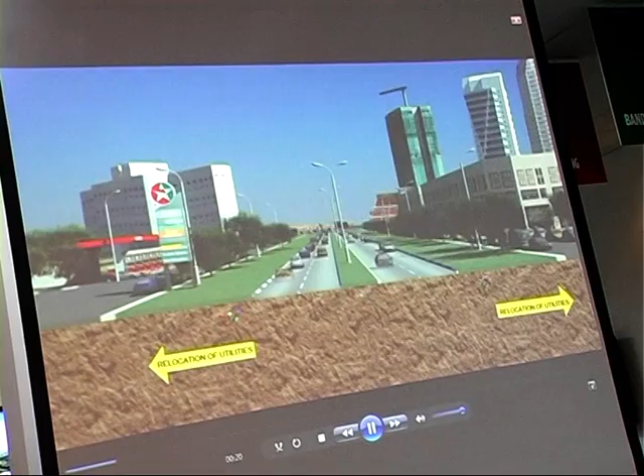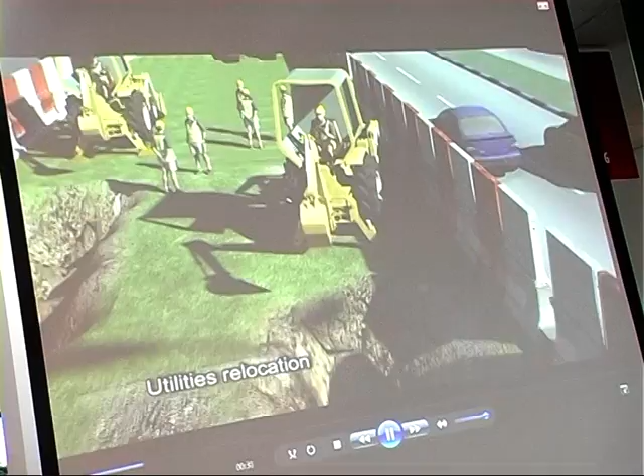So what you see is the first phase is utilities relocation. Those red, green and blue dots are relocation of utilities. So they are moved to the side of the road because work will be done on the median of the road.

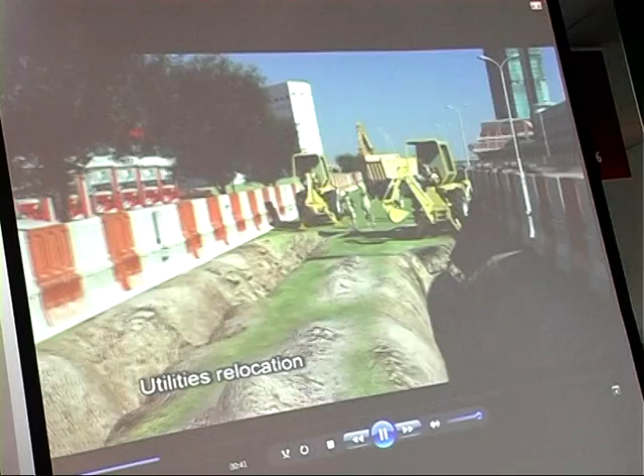This sample that we are showing you, this video, is actually in Taman Tun, the recreation of the Taman Tun work area.

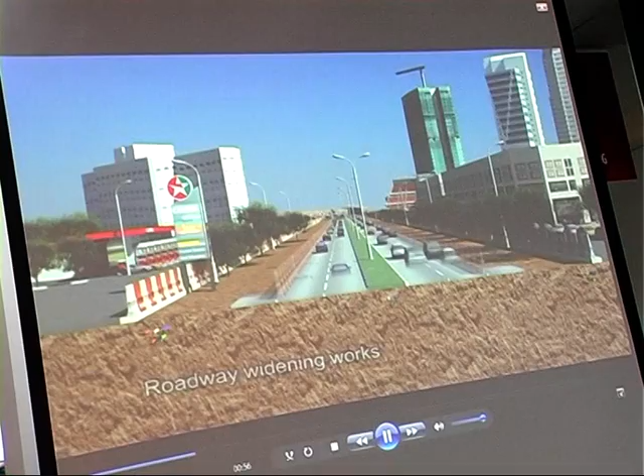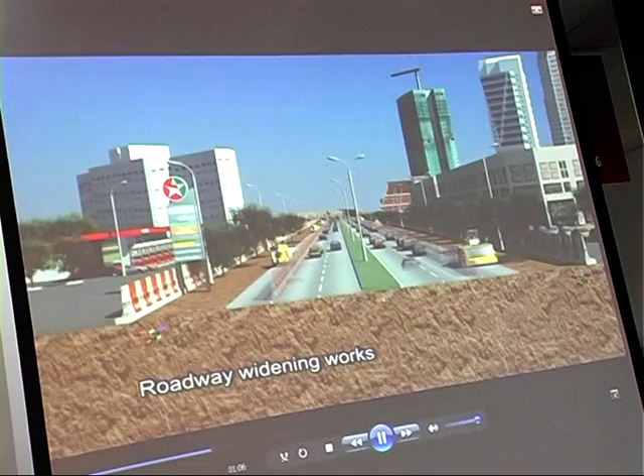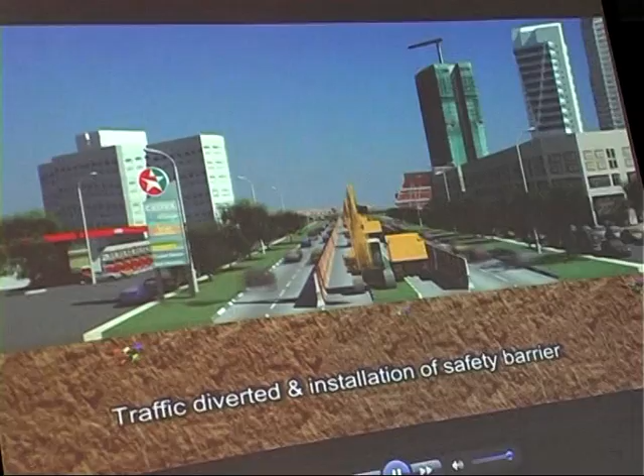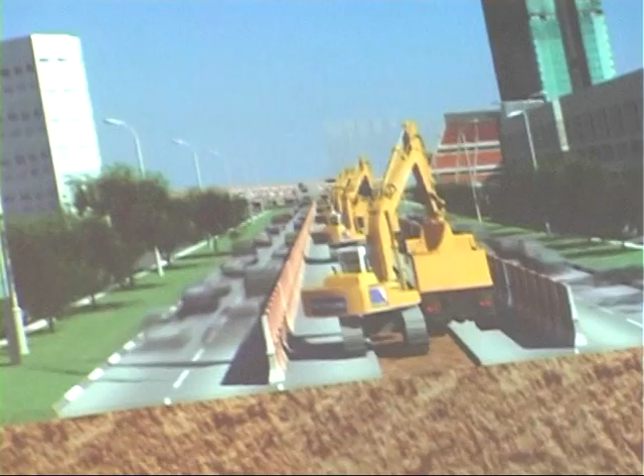So once it's already relocated to the side, then the road is tarred, so that this becomes the alternative route when we halt the center lane on both sides. So this is how it looks like when we have closed up the center area to work. Remain 2 lanes. The commitment that we make is that we are going to close lanes, but we will make sure that we get an alternative lane back for motorists.

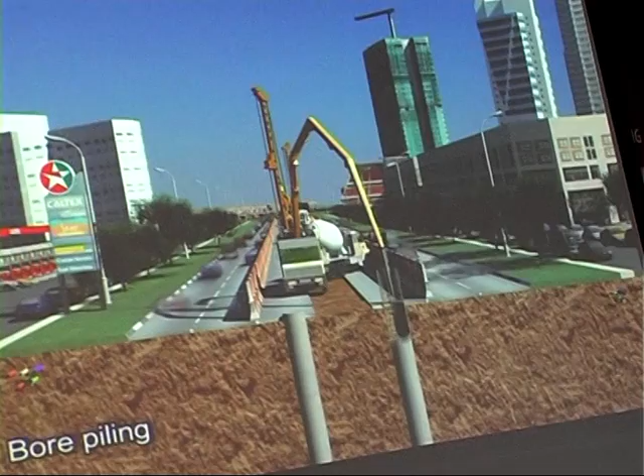Then the bore piling takes place. I wish it was this quick. It's not going to be this quick, but basically bore piling is the best way to do it. So once the bore is made, then you pour in the cement.

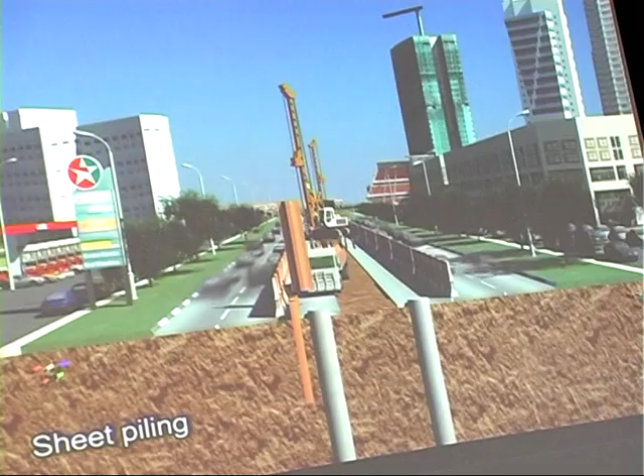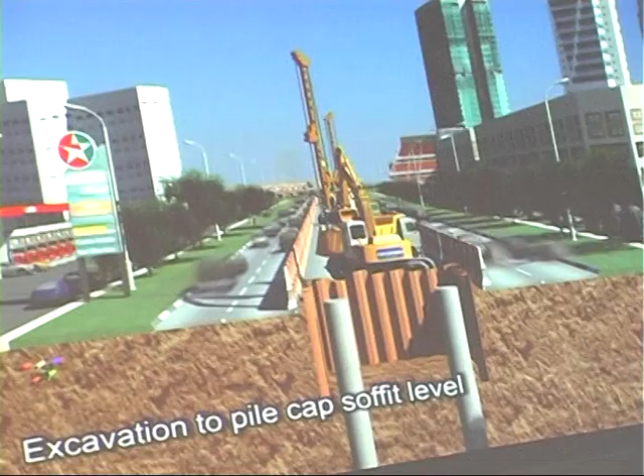So the sheet piling is installed so that we can do the excavation work to strengthen the area. Excavation to the pile cap soffit level, and then the pile cap is constructed above this.

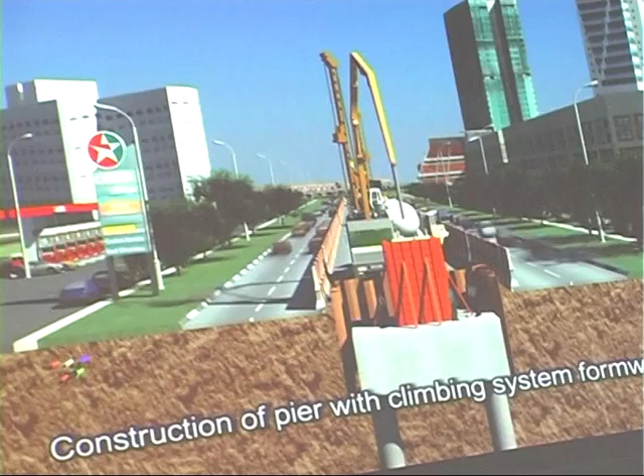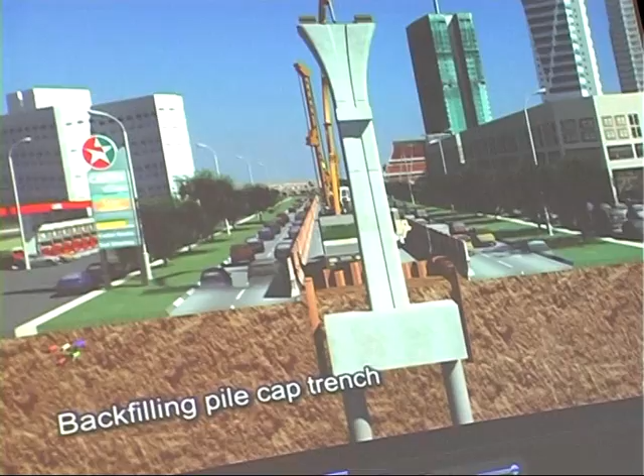Advanced climbing system formwork will be used for the construction of piers. So this is the pier construction, which uses the formwork method. Backfill the pile cap trench, and then you pick up the sheet piles again. We'll move on to the next area.

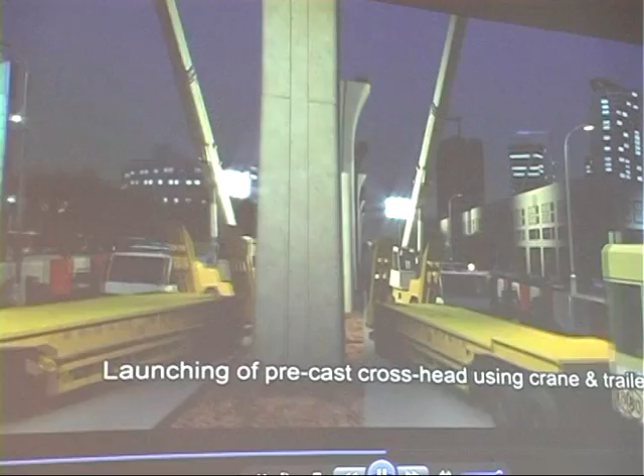Now at night, what's going to happen is if we have to close any lanes, we'll only do it between 12 a.m. to 5 a.m. This is again to ensure minimal disruption in traffic.

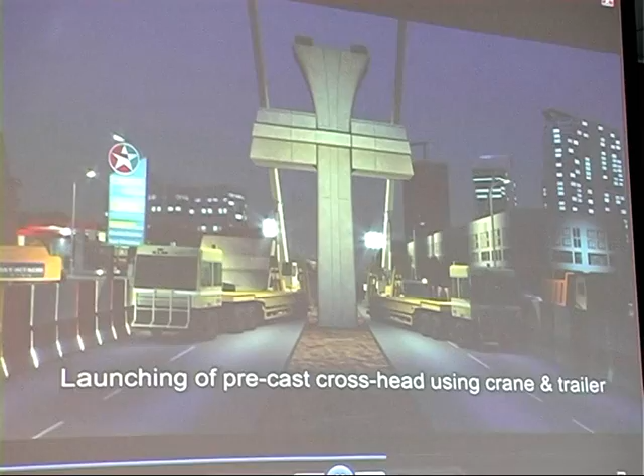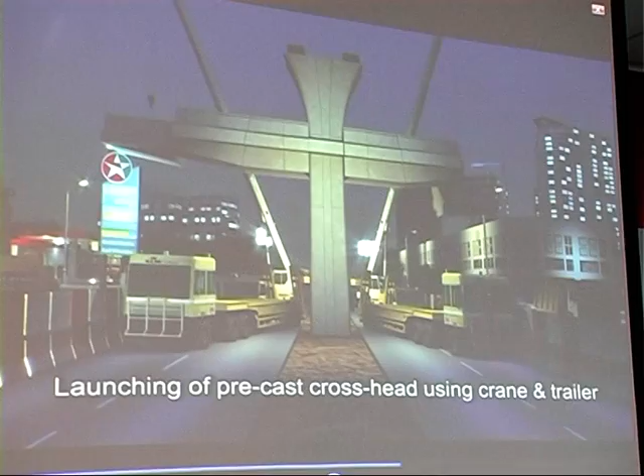So the SBGs, or the segmental box girders, will be launched. This is precast offsite. This is for the station construction. It's done offsite so that we get better quality control and everything else. Obviously between 12 a.m. to 5 a.m. traffic is less, so we are able to close one lane.

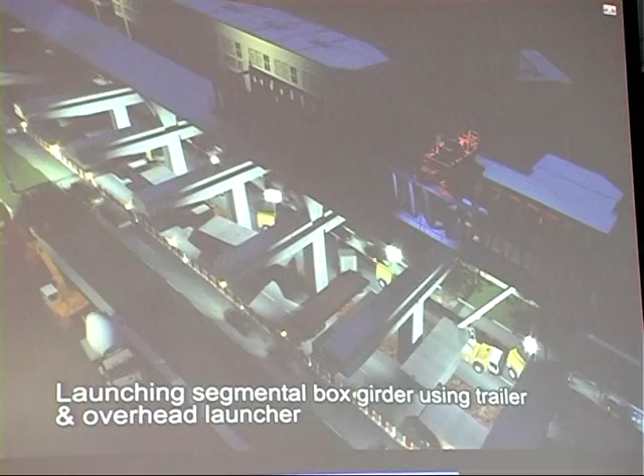These are the segmental box girders. What you're looking at now is the construction of the station, the space for the station after this.

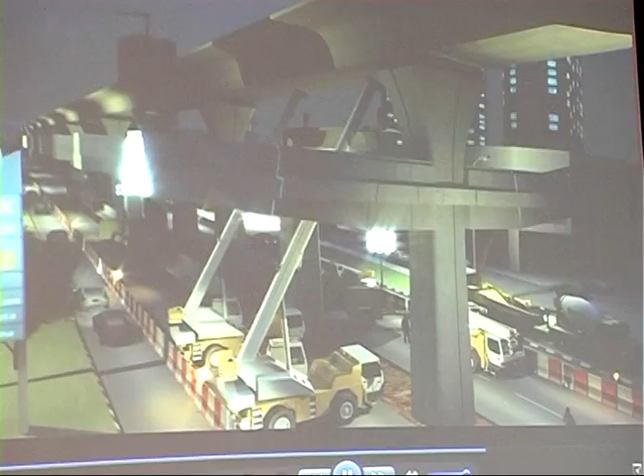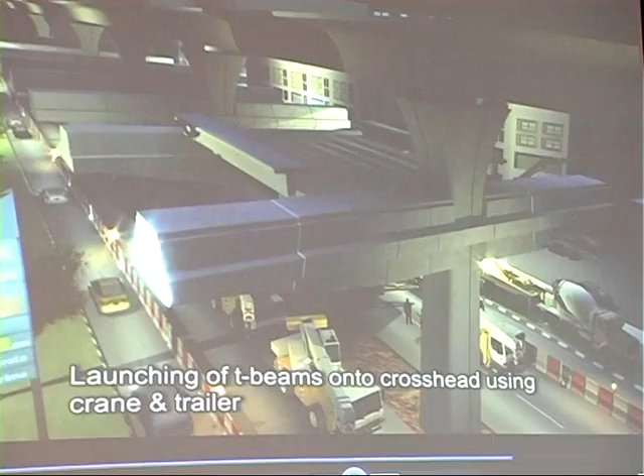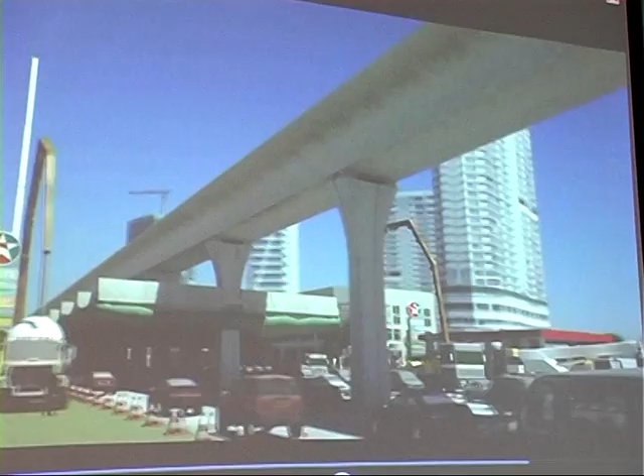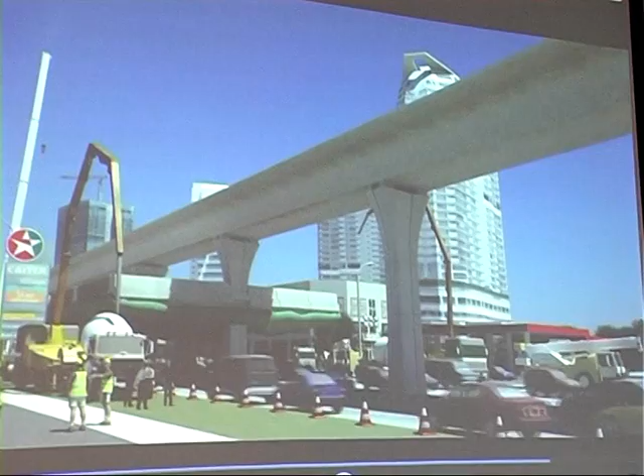Now when that level of works above is completed, road traffic reverts to a normal traffic flow. Netting is put below the station floor to ensure that any debris that falls is protected.

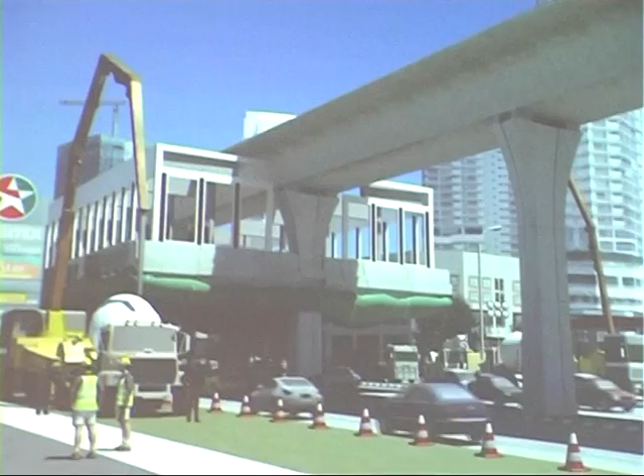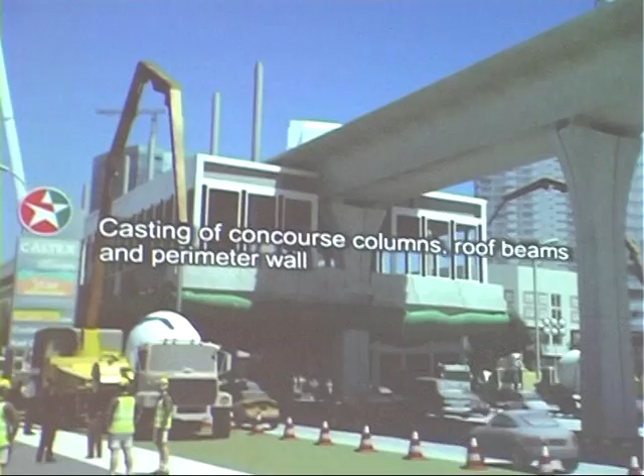So now the station is being constructed. Further station construction activities continue above concourse level with traffic safely flowing underneath. Construction of elevated station continues till completion without further disruptions to traffic flow.

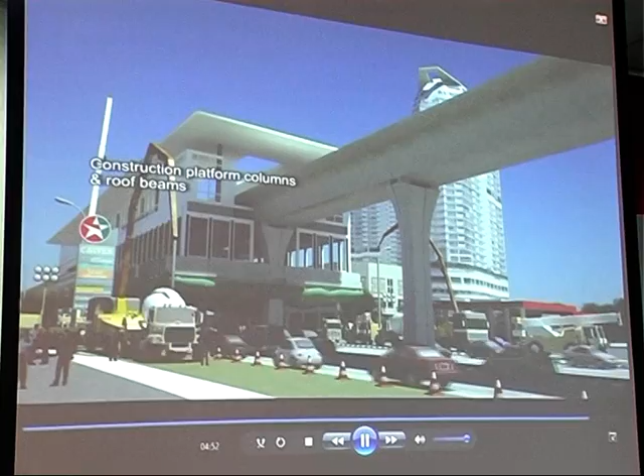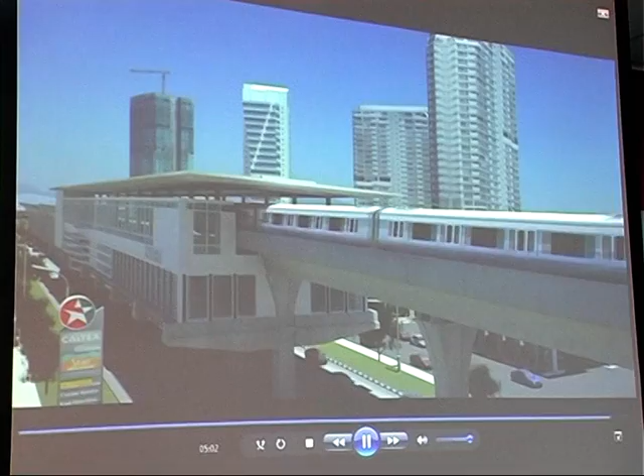So that's how it looks like, the whole construction process. About 5 minutes on video, about 4 years in real time.

So I'll let Adil now take through the alternative traffic routes that has been identified for motorists in Kuala Lumpur.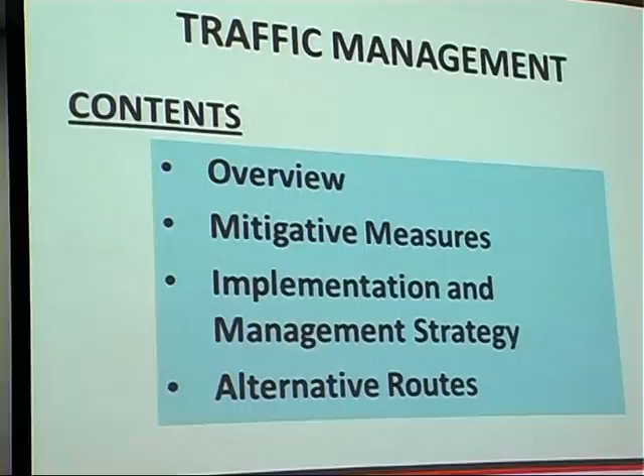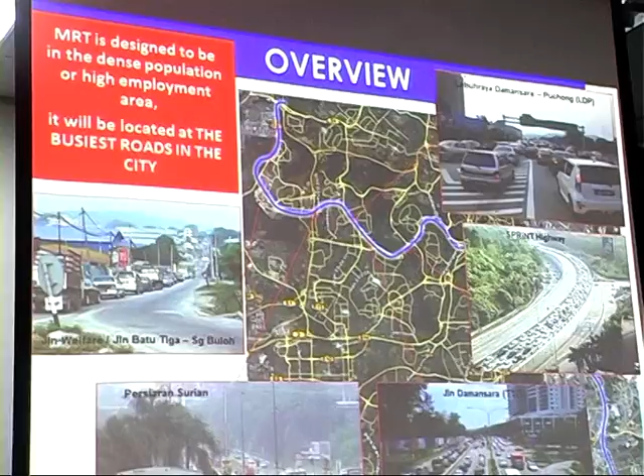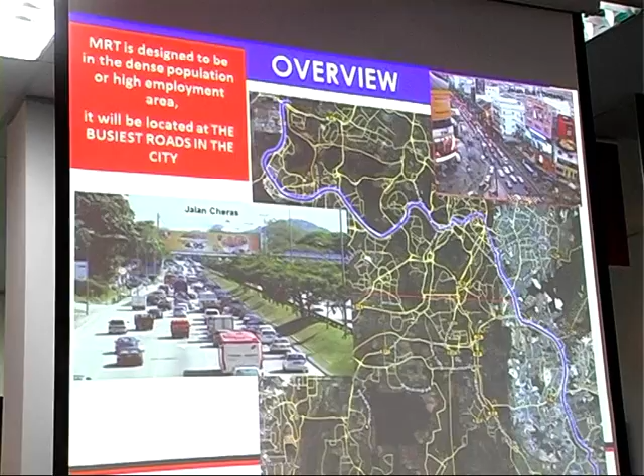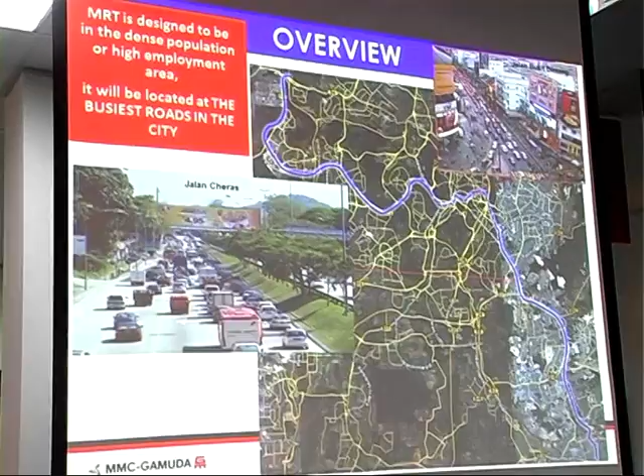As you know, the alignment for the KVMRT passes through some of the most heavily congested roads. You can see these are some of the views where the alignment will pass on PJ, even in the city center. So once the construction work starts, you can only expect the traffic situation to get worse.

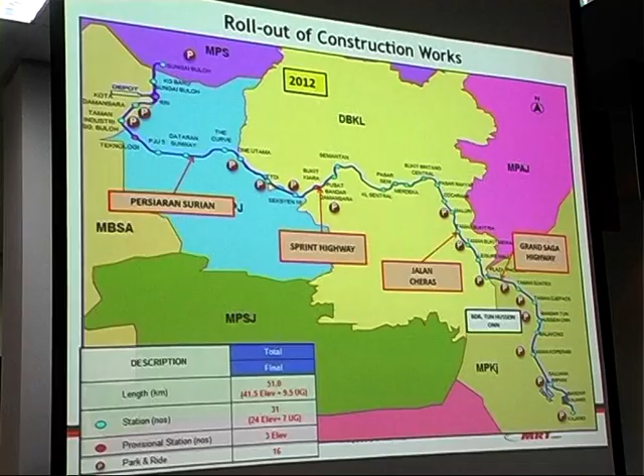Since we started the construction work in 2012, some work fronts have opened up at various locations throughout the whole alignment from Sungai Buloh to Kajang. And as the year progressed, more work fronts will be opened up.

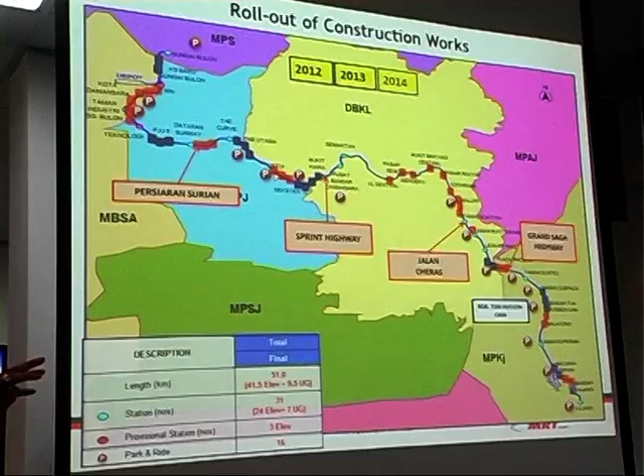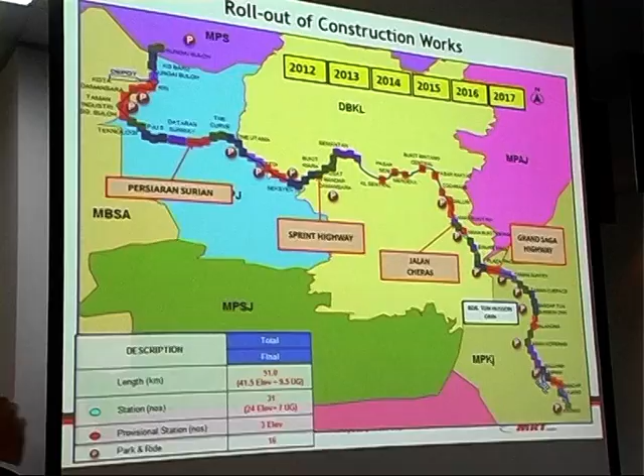Eventually, when we get to 2015, almost all the areas will be opened up. Construction will end in 2017. But towards the last 2 years, a lot of the works will be concentrated above ground, so some of the traffic areas you can expect to be released from construction activities.

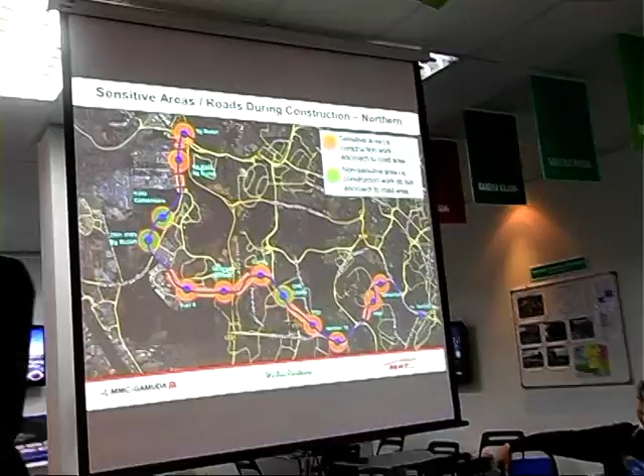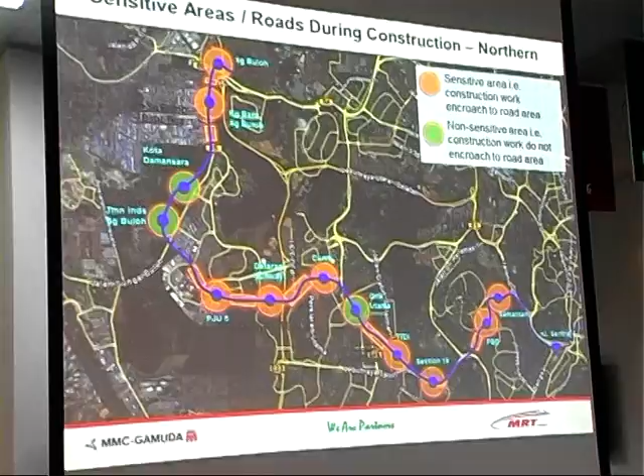Just want to highlight some sensitive areas. When we say sensitive, means areas that will be directly impacted by the construction works for the KVMRT. This basically gives you an idea of the alignment and where the sensitive areas are. Sensitive is denoted in orange. Non-sensitive or less sensitive areas are basically highlighted in green.

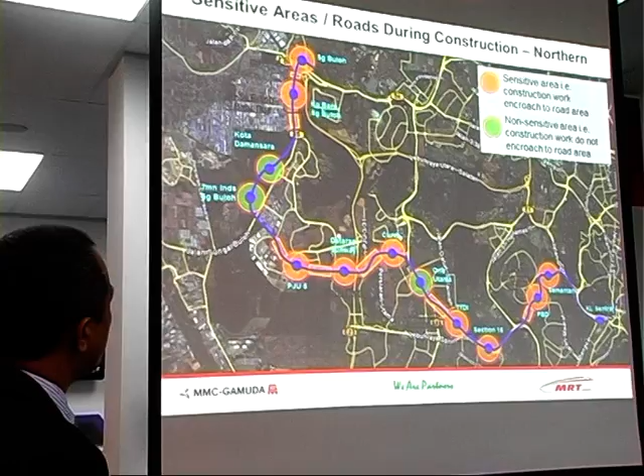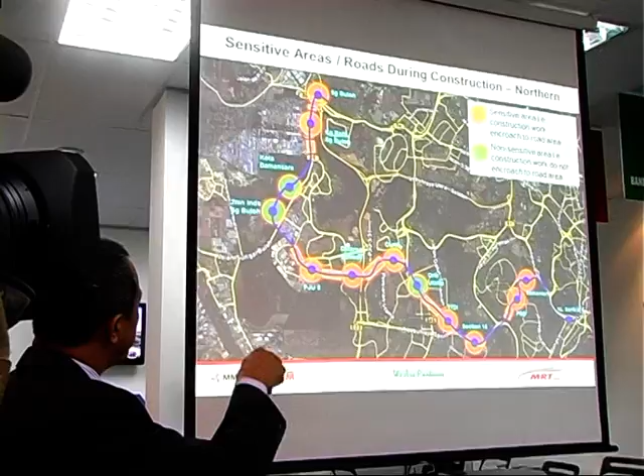You can see that if we start from Sungai Buloh along the old Batu Tiga Sungai Buloh Road, we consider that as sensitive areas because the works will be right next to the existing road. In this area, where the Kota Damansara station and the Taman Industri station is, they are relatively away from the road, so we consider that as less sensitive.